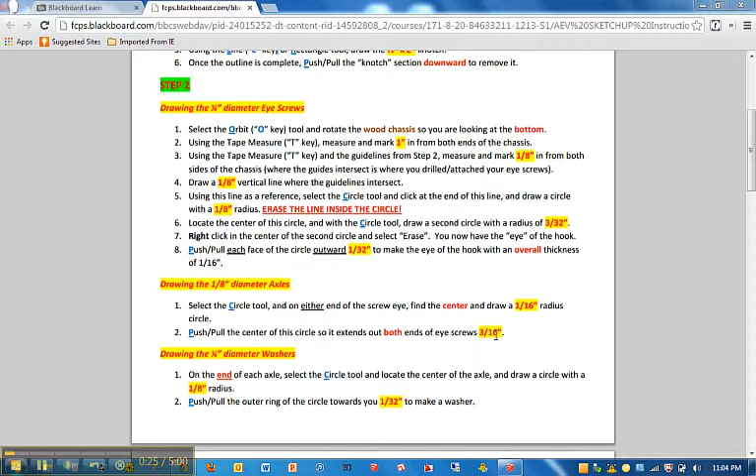Now we're going to jump to the next part of step 2, which is drawing the 1/8 inch diameter axles. They have a 1/16 inch radius. Once we create this circle, we're going to push-pull, making sure the axles extend out 3/16 of an inch from each eye screw. Watching this will make a bit more sense in the video.

Let me jump into my drawing. I've drawn all my eye screws from the last video, so here's where I'm going to go ahead and draw a circle. Once again, I have these guide points, which are nice.

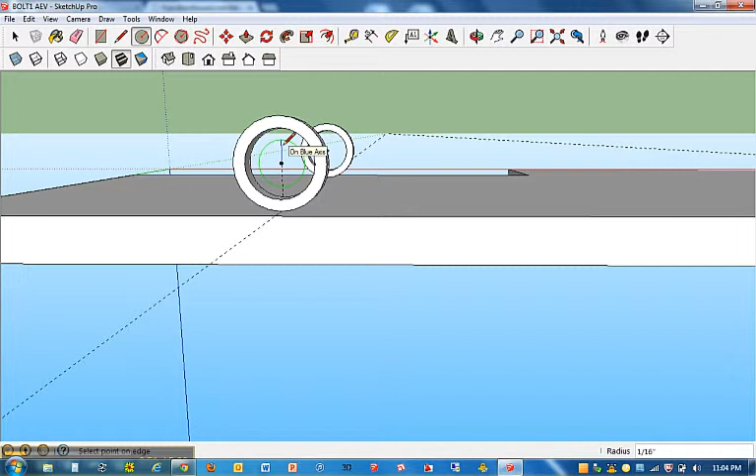Now I once again need green, so I can either rotate to get the right orientation, click once, and move. I'm going to type in 1/16. Okay, so there I have that.

I'm going to hit P for push-pull. I'm actually going to push-pull this basically all the way to the next guide. One thing you'll notice is that the axles are kind of somewhat inside the eye hook, but that's fine. Now I'm going to hit P for push-pull again, click once, and this time move out.

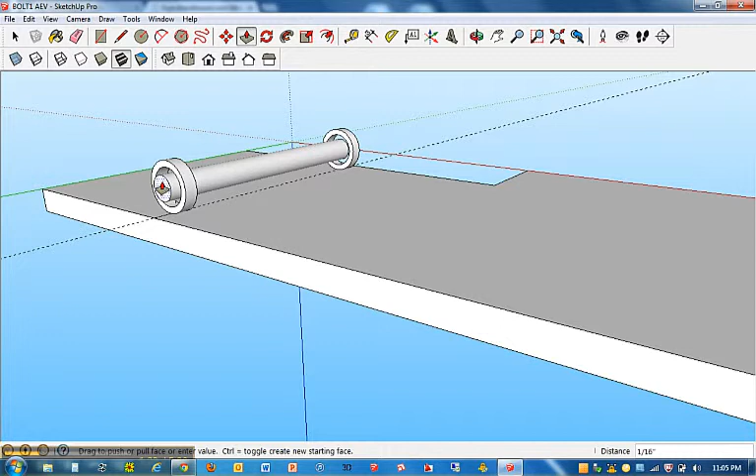I'm going to specifically type in a number: 3/16. What that did for me is the axle just extends just past the edge of the chassis. So once again, let me jump over here, click once, move out, and type in 3/16.

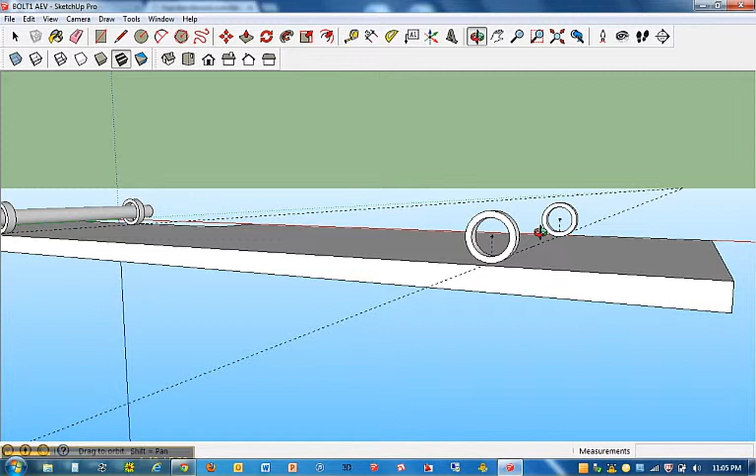So let's draw that second axle here on the front. Once again, hit C for circle. Remember, if you don't get the green axis, find a green face, hold down your shift key, keep it held down, click once on that guide. You can now let go of the shift key if you like, and just move in the direction you want the circle to be drawn.

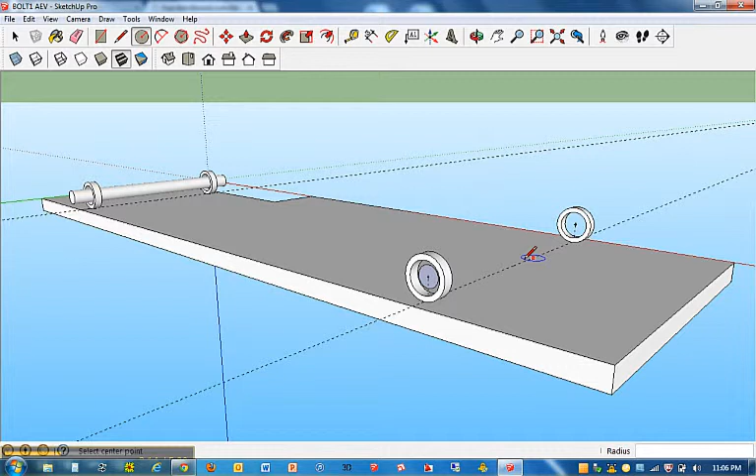I'm going to type in 1/16 — that's the radius, which gives me an 1/8 inch diameter circle. P for push-pull, click once. Even though I'm in push-pull mode, I can hold down the wheel on my mouse and it kind of snaps back to push-pull. I'm going to stop right there on that guide.

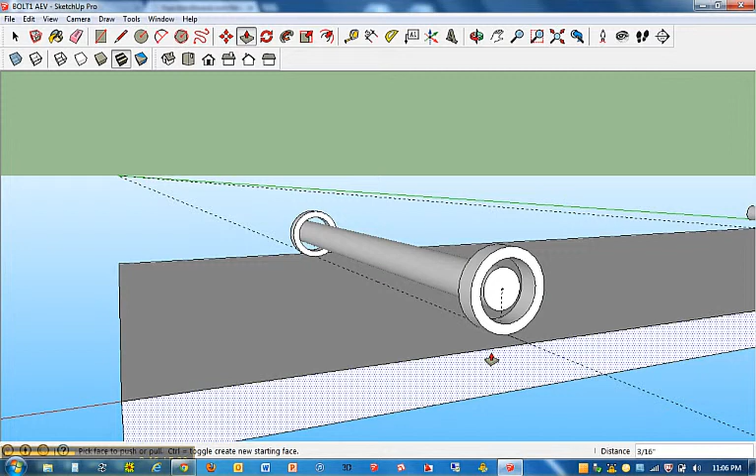Now, once again, let's extend these out about 3/16 of an inch. I'm going to click once, move in the direction you want to push-pull, 3/16. Then jump over here, click once, 3/16.

Okay, another part we'll add to this — I'll just draw one of these, which are the washers. You'll find in the instructions that we go to the end of these axles and make an 1/8 inch radius, and then end up making the washers 1/32 of an inch in thickness. So remember, 1/8 inch radius.

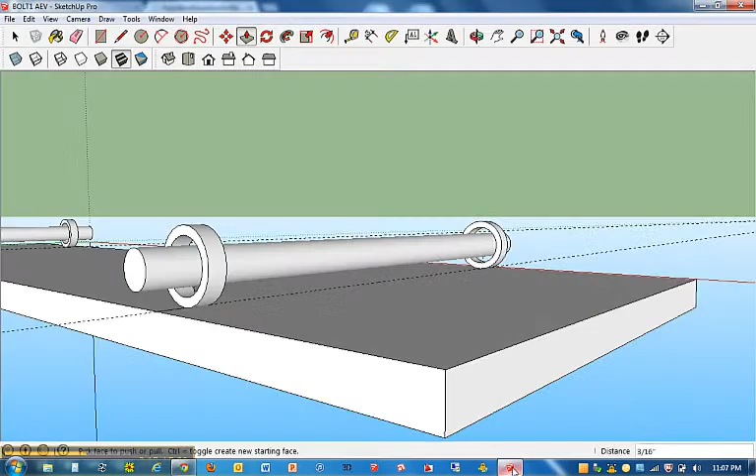Let's jump over here, I'll just do one of these. C for circle. To find the center of the circle, you just hover, hover, hover. Click once, and move out. I'll type in 1/8, which gives me actually a 1/4 inch circle, as you can see.

I'm going to hit P for push-pull. I'm actually going to pull this out 1/32.

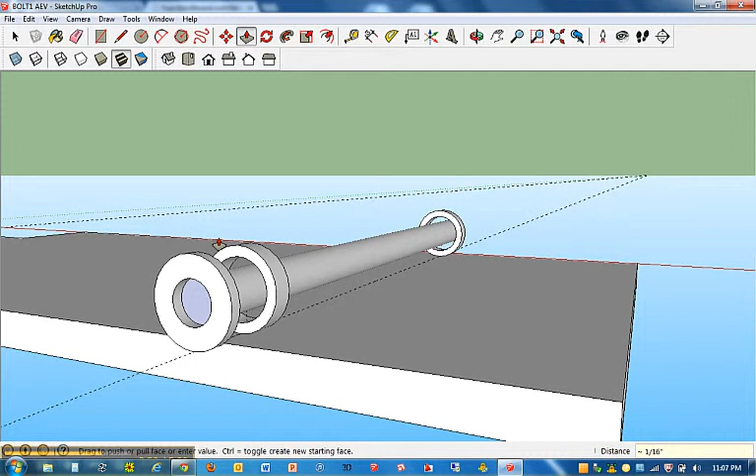Now, something I like to do, just to make it a little easier for the following step, is take the center of this axle and push-pull it out as well. To make sure it's on the same plane, if I touch any part of this washer, it'll stop. Okay, let me do that one more time. Let me jump to the other side.

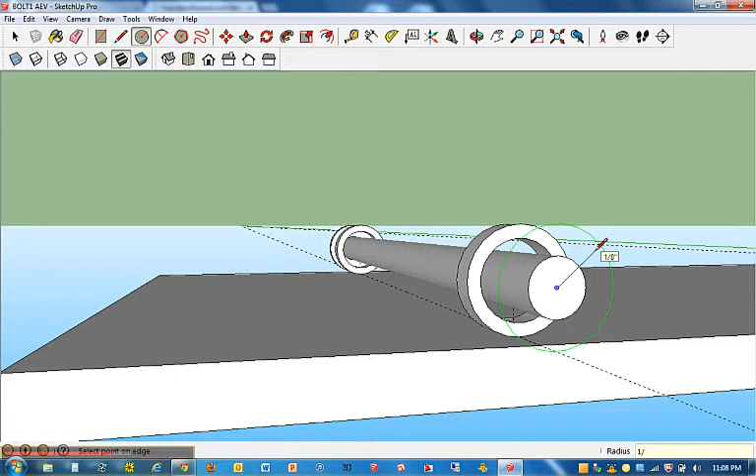C for circle, hover, hover, hover, find center, click once, move outward. I'll type in 1/8, which gives us a 1/4 inch diameter circle. P for push-pull, come out 1/32, and then we'll do the same thing here — click on that inner axle and just touch any part of this face. There we have our washers.

Okay, so we'll do that also for the back axle as well. Save your work, and then we'll watch the next video.